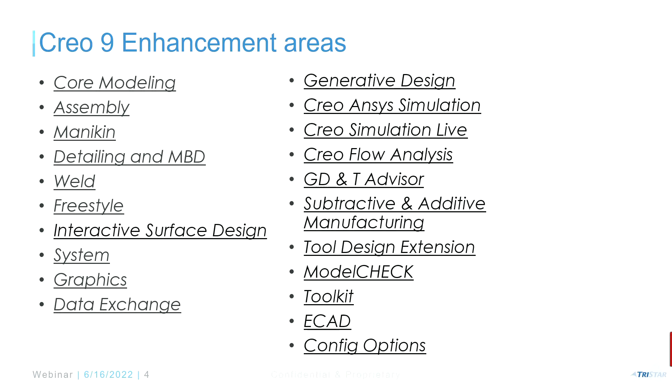Usually I'll run through a couple of slides, so I'll switch between the slides. But feel free to stop me at any point with any questions, anytime. I'll be showing most of the enhancements here - this is what I want to focus on.

But some of you might ask - most of you were on Creo 5 or 6, right? I don't think any of you are on 8 or 9. So I thought I should give you a quick overview. PTC's moved to a yearly release cycle, I'm sure all of you know. About 2 months ago, April 20th is when they released Creo 9.0. 9.0.1.0, the first maintenance date code, is going to be released in July it looks like, and 8.0 was about a year ago.

Some of you are already using it, so it kind of gives you the calendar. I just took some screenshots yesterday from PTC's product calendar so you kind of know. Creo 7, at the peak of the pandemic, is when it was released in April. So you're going to see very minor incremental changes moving forward because of the yearly release cycle.

Compared to back in the days, going from Pro-Engineer Wildfire to Creo 2, or from the old iSquare to Wildfire - remember, it was a big change, right? You're not going to see that anymore. It's going to be incremental, okay?

Windchill - how many of you use Windchill right now to manage your files? Before moving to Creo 9, I personally used to be an admin during my industry days. We don't recommend moving to 9 with 9.0.0.0 being the first date code - we recommend allowing it to mature. But you also have to know what is compatible, so you have to be on Windchill 12.0.2.0. We could share this PowerPoint with you.

This is just a quick matrix - in order to do Creo 9, as you can see here, you have to have at least 12.0, and that's where it is. You can see the compatibility chart here. So let's get to the main things.

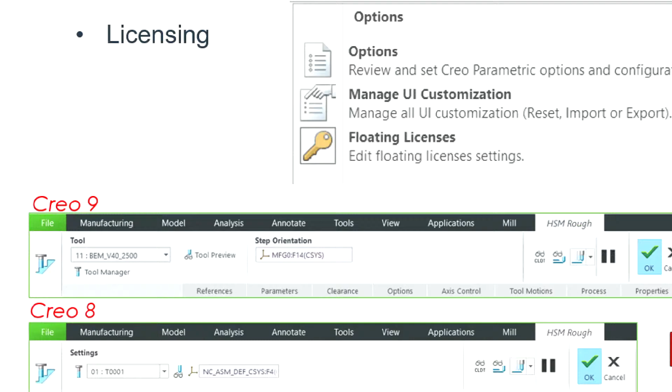They've modernized some of the dashboards, as you can see here. This is an NC one where they started doing that in Creo 6, Creo 7, where they laid it out a little bit here, and they've done it on NC in augmented reality areas, and also in sensors. There was something called Creo Product Insight extension.

They've improved the dashboard. For the users, though, I really like how finally you can look at the license information right from within Creo. Remember the old PTC status? It's still there for the admin or any user to check who is using licenses, and whether any free licenses are available. Now, right from inside Creo, where you have your floating licenses checkbox, you can click License Info, and it'll give you very useful information, I think. Before, admins had to set up that ptcstatus.bat file for the users, and they had to click on it to see it, so I think that's pretty nice.

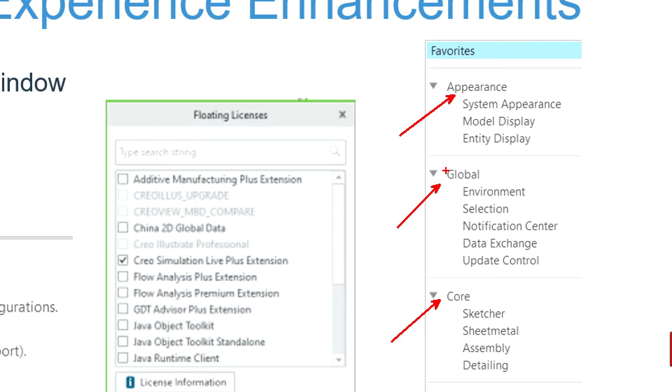Okay, so a few things. I really like how they structured the options now. See here? Appearance, global, core, right? Before it was all in one single list. Maybe I'm doing top-down design and I want to set up some control on external reference, for example. I had to go to assembly. Now they have global, system appearance, and core areas like assembly controlled separately here. So pretty much the same as before, but I like how it's structured, okay?

Now, one minor thing, it's not a major thing, but we've had customers ask, because in some other CAD systems you can use the arrow keys to rotate and spin. Finally, PTC has that now. In Creo, you're able to hold down Shift and use your arrow keys to rotate. Shift and Alt will do the screen center, which is the model center.

In fact, let's take a quick look, right? Let me switch to, I had a couple of models open already. I have just an assembly here, a data set that I use for my demos. By the way, I'm using Creo. This is the one I was talking about first.

If I go to File Options, see how it's kind of appearance, global, core, right? A little structure, I think, that's not a big deal.

If I want to look at my licensing, I can go to File Options, Floating Licenses. Now, I don't have any floating license in there, but at least if I click on License Info, there you go. Remember, in the past, you had to go to PTC status, if you remember how to get to this one, those who've used Creo probably know that, right?

You go to your C drive, or in your admin, the admin has set it up for you. In my case, I'll show you the old way of doing it. You have to literally go to program files, where I install my FlexNet license server, for example. I've got my PTC folder here, my FlexNet admin license server, and then you have to go to bin. I used to have a shortcut during my industry days, but there I could go to PTC status, run that, and it'll open up a command prompt showing I'm having a standalone license, unlike your company where you're all using floating license. So this is kind of how you'll know what is free, what is used, etc. This used to be there for a long time, ever since I can remember, since the 90s. But I like how you can access that right inside of your file options now, that's a nice thing, I think.

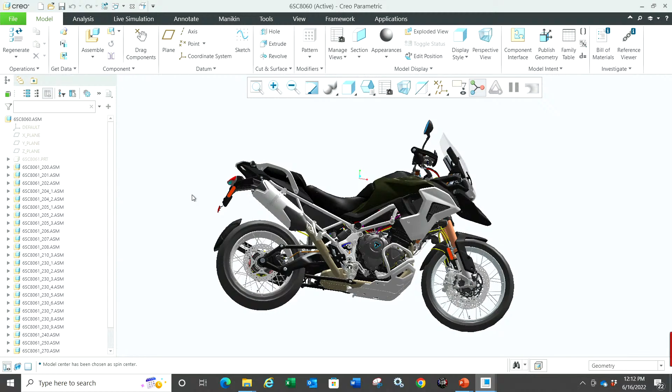I'm just thinking, why do you think this might be helpful, for example? Maybe I'm going to some precise view here. I may want to have some slight precise orientations, right? Before you had to go to View, Orient, and use an arrow key, but now you're able to just use Shift and slightly navigate. Can I control that angle? Don't you think it looks like 15 degrees right now? Absolutely.

You can go to File, Options, and under Model Display, there is this default rotation setting, 15. So maybe I could potentially switch that to 90, right?

I can go from front. I remember during my industry days I used to use VF for view front, there was a map key I used to have, VB for view back. You can still do those. Those who are fans of map keys, how many of you use them? Even now, keyboard shortcuts, it's still there. Good old days, right? It reminds me of that. It's nice that they have it.

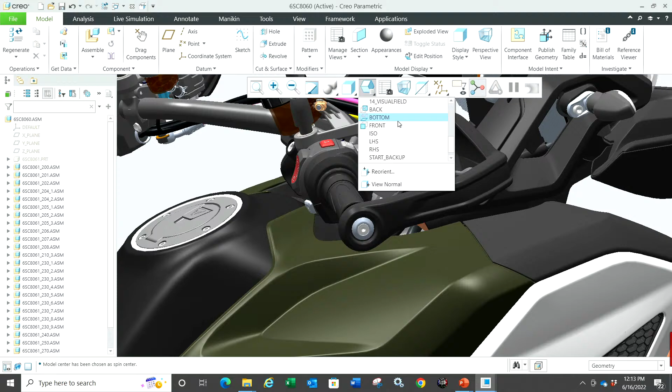So for example, I'm going to set it to 90 real quick, and I'm not going to change my config option here. Let's say I want to go to one of the front views, not a big deal, just a regular view like this. Front view. I can now go Shift, and if I do this, you see that? I'm using my 90 here, using my arrow up and down keys, which I know most of you may have macros for all this, but it's another option there.

They also, I don't know how beneficial this will be, but you could zoom out a little bit, or off the screen center. So far everything was model center. I can hold down Shift Alt, and then right-click here. So what I'm doing is holding down Shift Alt, where the model center or screen center becomes my point of reference, and it's rotating off of that. So a couple things, nothing groundbreaking on the usability side, but a couple things in there.

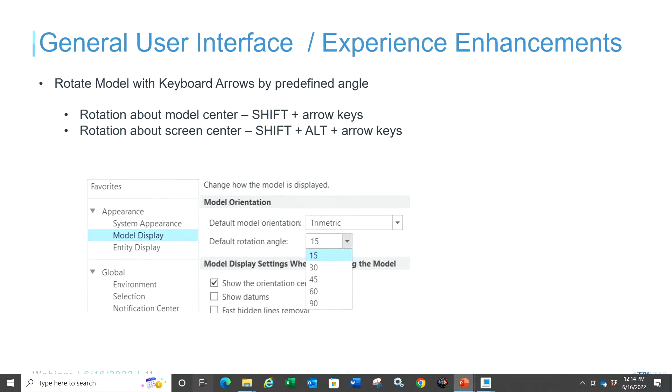Now most of you may have used this before in Creo 4. How many of you used the mini toolbar? I'm a huge fan of the mini toolbar, the right mouse click. It was long overdue, I thought, since SolidWorks and every other CAD system had it. We were the only one that didn't have a floating toolbar. So I hope you've customized it, right?

Config.ui, they used to have zoom to in there before, it's nothing new. But you have a new config option that allows you to control the level of zoom. Where would I use it? When you have a failure in an assembly or part model with a missing reference, I'd like to go to the reference viewer and zoom to. But sometimes it's a very tiny missing reference, so I like that config option where it's set to 1. You can set it to 2.0, 3.0, controlling the zoom level, so it zooms in a little more quickly and you're not spending time navigating.

Now please remember, moving forward, all config options by PTC will be backported to previous releases. If something is introduced in 9.0, there's a good chance it may be available in a previous release for a later datecode. Just an FYI.

So we'll get to sketch on a few things, but let me get into one of my designs real quick here, so maybe I'll just open up that model. This is the one I was talking about, the mini toolbar. I'm sure all of you have customized this. You can always right-click customize, and you can always add additional commands there.

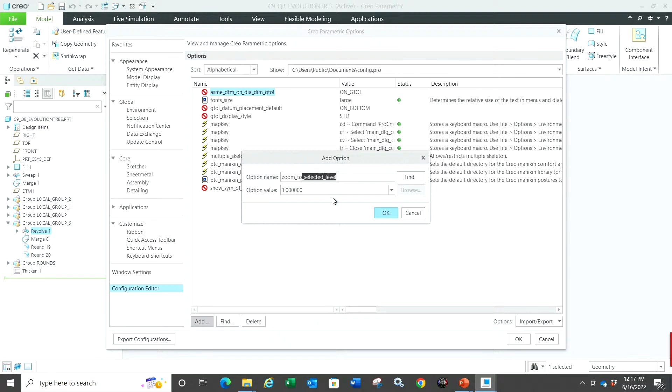The good old config is still the same. I'm sure many of you use the config.sup, the supervisor config, the local config. There you can go and say, I want to add, for example, zoom_to_selected_level. You can share the PPT, you don't have to note down all these configs, but they're all available on the PTC site too. But the size is 1. I could set it to 2, let's see how it looks. I'm going to set it to double the scale there, and now if I go up here and say zoom to, it goes a little bit inside.

Same thing works on reference viewer. I'm sure all of you like the good old reference viewer. What is it used for? You can investigate the parent-child relationship when failure happens, right? We all know that, experienced users have been there for a while. So you still have the good old parents and children, this feature is in the hot seat. I'm investigating that right now, and I can always go into any of these references inside. This was introduced way back in Creo 4 also, actually. You can click on any one of them. Again, if I go back in here, right click, and I can zoom to any one of them, same thing. So it was there even before - not a big enhancement, but I like some of the usability enhancements there.

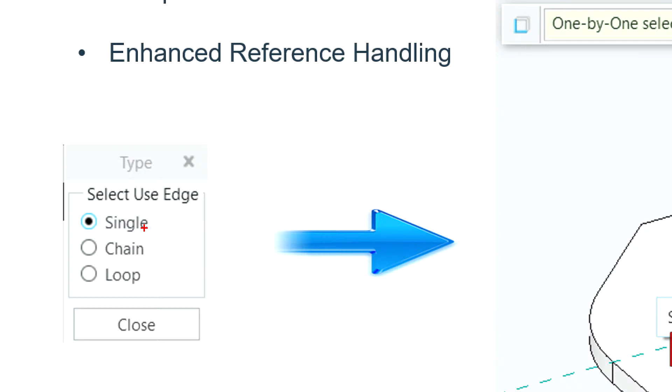One of the big ones in Creo 9, I finally got rid of that menu manager for project and offset. I thought it was long overdue. How many of you use project and offset? That's how you build design intent, right? Maybe I want to create an offset, like a group off of that - when they change, it should update. We all know that, the power of Creo. The problem was that menu manager, it'll come with single chain, and the flip arrow is always in negative direction. PTC worked on it finally - it's more consistent with the regular selection techniques. Remember the shift-C boundary loop surfaces, many of you may be using it - it's very consistent with that.

A demo is always better than a PowerPoint, right? So let me switch to a model here. I'm going to go to Creo, and let's say I want to go to shading with edges here. Just a simple model we put together.

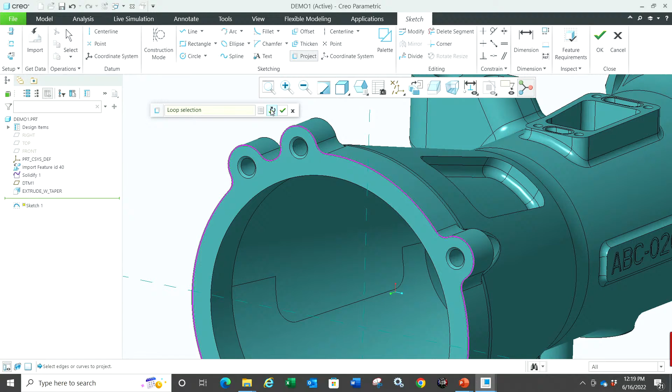So let's say I have to - I'm going to use multi-body here, and I'm going to create another part on top of it. By the way, how many of you use multi-body in Creo 7? Some of you, okay, I'll just create a new extrude here real quick.

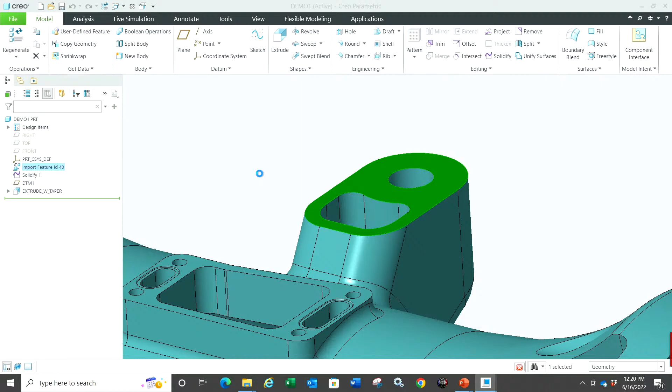And let's say I want to go and start creating some, maybe not on that geometry, I want to have an offset plane that I'm going to use real quick so I can literally see. Maybe I want to just sketch on this plane here, right? I have an offset plane where I'm going to quickly do an extrude. And when I'm doing that extrude, what I'm going to do is I'm going to go project. And if I put this edge, you see how it gives you a preview.

That's it, right? So I can still do my old school one-by-one chain if I have to, but it's not a good practice. Why? From a referencing standpoint, every edge has an ID. We all know geometry ID. So you cannot replace them quickly. If you pick them as a loop, you have a better chance of failure not happening. This model is more robust to design changes. So that's kind of what we are doing here, right?

I can hold down the shift key and get the tangent loop, for example, or I can do the surface loop, right? Or I can say, no, I don't want this as a preview here. I can leave it, I can do the same thing on this one. I can hold down the shift key and get this one, right? So it's a little more consistent now. Some of you may not like the shift thing.

You click on this guy here, the details. You can go to the details, and you still have your old school rule-based selection, right? If you want. Remember, this is a button that's available in all features in Creo, right? It's been there for a while. There you can say, okay, I want to have a partial loop or a tangent loop. You don't have to use a shift key itself, but I'm just saying, right? You could.

So let's say that I want to get done with this one here. Maybe I want to project it. I want to project one, and maybe I want to use the entire kind of loop there, right? It's one loop. I also want to maybe select, I'm in repeat mode right now. I turn on my repeat. It'll stay there forever until you exit out of it. And I can just pick another guy here. I hold down the shift key, and I keep adding additional ones, right?

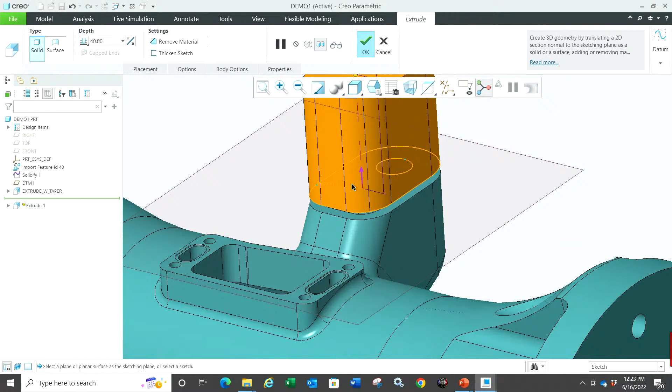At this point, maybe I want to just drag this guy, and all of you know the shift snap, I hope, right? You can hold down the shift, snap, and you can quickly go up to surface, right? And you're going to add material here, but I'm going to do a new body, right? I'm going to create a new body here. Let's see if I could just go the blind depth, actually. And I'm going to just go up to the surface there, right?

I created a new solid here, or a new body. As you can see, I got two bodies now, right? There's my gusset body, and there's another body here, right? I'm able to go and make it transparent and all that, right? So, but what if I want to kind of replace this edge geometry with this one, or maybe I should have actually added this as my loop, right? This is what I should have added as a loop.

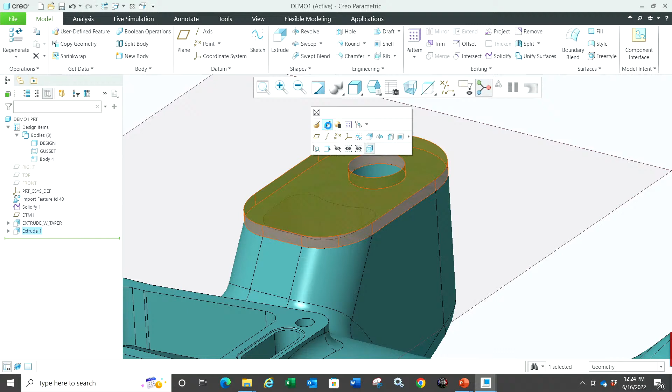I could quickly go into any of those features real quick, do an edit definition here, and I can pick it that way like you normally do, or you could use the references. I'm sure most of you know the edit reference, where you switch references. It's supposed to be a good practice, where it'll highlight all the edges, as you can see here, right? Including the edge you picked and the other edge you picked. I could just say replace that guy with this one and do a little preview, and just like that, the loop worked. Is that making sense? I didn't have to go and pick it again, right?

So just a simple example to show you that robustness of the design is kept more when you do the complete loop there, right? So just one small enhancement, I would say. Hopefully all of you like the new methods of selecting, right? The whole shift key and picking it, right? Oh, this is long overdue, I thought. During my industry days itself, I had put together an enhancement request for this.

Have you noticed always the first sketch is huge in Creo? What is the workaround? You have to either change the plane size, right? There's a lot of workarounds. I used to create a dummy circle, hide it in my start part, so everybody will start with a 5 or 10 millimeter an inch model, right? There's several workarounds. Finally, the first weak dimension you change, it will automatically scale, kind of like the old school log scale. It will scale everybody else.

So let me show you a demo. It's really only for the first sketch, right? This is long overdue, I thought, by PTC. So let me create a quick model here, right? I'll just do a new part, right? By the way, it's only for a new part. It doesn't even work when you do edit definition. It's only for the new part, okay? When I'm creating a new part, for example, I'm just doing a very basic new part.

Sorry, I'm going a little fast. I want to include as much as possible. I hope the pace is okay. I'm talking fast too, but there's a lot to cover.

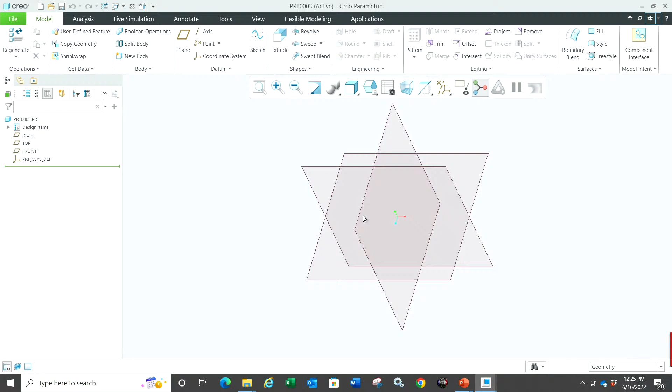So I'm going to go into one of my sketches here. I'm going to do a sketch feature here. And let's say I'm going to hide my planes and everything. Right, and let's say I want to do a quick, I know it's not a good practice to add a chamfer in the sketch, right? I would have done this as a chamfer, but let's say I'm doing it anyways. Okay, so I just want to show you, there it goes, right?

I'm done with it. Remember, the old school method was you had to drag select all the dimensions. Remember that guy, the little modify guy right there? And then you had to do the lock scale. So if you change one dimension, everything will proportionally update, right? That was the best practice until Creo 8. Starting Creo 9, why do we still have it? Because you may still have to use it during edit definition. I wish PTC would have made it always like that, but they're making it only for the first feature, okay?

So how do you do it now? You don't have to do it that method. Just watch the dimensions here, right? What do I have? 269, 142, 150, some really huge values, right? All I have to do, select this guy and set it to 1. Watch what happens to the rest of the weak dimensions. 0.6, 0.53, 0.59, the angle. So I thought this is long overdue by PTC, right? Something like this, they do it after a long time and call it an enhancement. That's interesting. So anyway.

Does it affect... that is in Creo 8 itself. When you do a circle, let's say diameter 5, Creo 8 doesn't have such extreme values. It doesn't go like 100. They fixed it. That's a very good question. So what Mike is asking about is when you do your first sketch, have you seen it? You'll always have to zoom out. It's really some huge values. That's being fixed. So hopefully all of you like that one, right? There it is. So very minor in sketches.

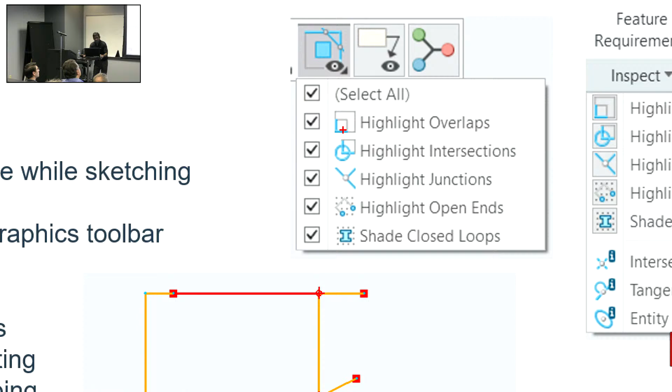Have you tried the highlight overlap before? Many times I would copy an edge 2 times accidentally. It'll be right behind, but it'll never highlight. Have you seen? You drag it and finally it will stay. How about fixing a bug and calling it an enhancement, right, by PTC? So, anyway. Let's just go back to Creo, and I'll just open up some models here.

Let's see. This is a demo model I used to show customer sketch regions, right? If you remember, they introduced sketch region. I know it's a bad practice, I've done a lot of entities in one sketch. Sketches are supposed to be simple, but let's ignore that for now. It's an educational example, okay?

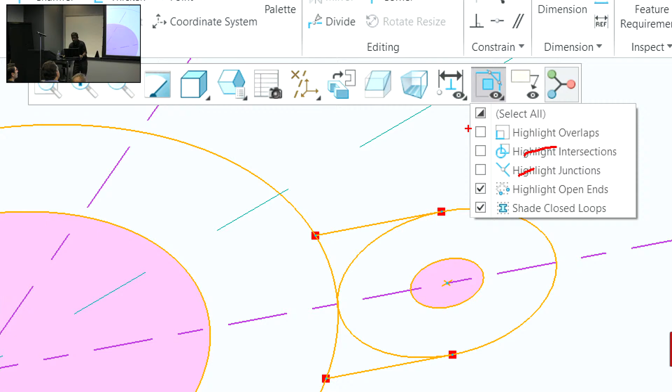So I'm going to go to this sketch and do an edit definition on that guy. And I'm going to hide my dimensions real quick, my constraints, so we can reduce the clutter on the screen. They have this new highlight junctions, highlight intersections. Before it used to be overlaps, open ends, and shade closed loops. Remember that? For inspection, before you're exiting the sketch. That has been there for a long time.

So let me uncheck everything. If I say show only junctions, it should show these guys in here. See that? But let's say for the sake of it, I'll just put in some line in there. And if I say show highlighted intersections, it highlights those intersections. Or let's say I had a line on top of a line or something like that, right?

Before, when you do highlight overlap, have you seen it, zoom out, zoom in, it goes away? It's not staying. Many of you are shaking your head, so you've been there. Finally it stays. You know what I used to do? I used to go down here, switch to geometry, the good old days, and then drag select, double click this guy to select it, and it'll highlight how many lines. It's a pain, right? And finally they have it.

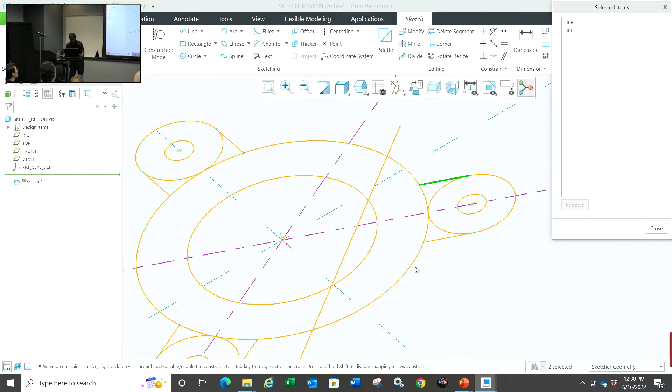You shouldn't be spending time on these, you should be focusing on your design, that's my opinion. Let me just go back to my presentation here. So really very easy to remember, three things in sketches: offset, project improved, auto scale, and the new inspection tool. That's it. Okay, this is a big one.

How many of you are FEA users here? Simulation or Creo Simulate or Mechanica? Some of you. So you do know in simulation, sometimes you have to apply a load locally, right? It's being held in some location, you're mimicking the real world contact. We have to do it local. For Creo, it's one single geometry, but we have to split it. Creo Simulate and Mechanica had a feature called surface region for a long time. However, Creo itself, the CAD side, didn't have that. Finally, they have something called split or divide surface.

What does that do? A lot of use cases in MBD, for appearances. Maybe I want to quickly do an offset, like an emboss feature. Have you tried this? It's doable, but a lot of workarounds: first you have to do a surface offset, create a sketch, do a project edge. I'm going to demonstrate within the time we have, I think we're good on time. I will show a lot of use cases. Could be used in FEA, could be used in sheet metal, to show the permitted stamping tool attachment surfaces here.

Or maybe in MBD, I'm going to send it to CMM or CAM or an inspection software, or even a STEP AP242, and when that downstream user clicks on the note, it should highlight those semantic references. We all know the importance of semantic reference. But now you're able to split surfaces just for appearances and for selecting semantic references. This is a big one. I would say in part modeling in Creo 9, this is the biggest project they worked on. PTC product managers typically train us before they release the beta version in January, and they told us this has been a long time coming.

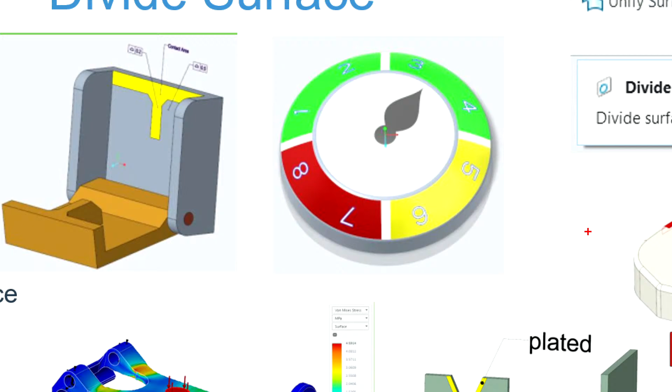Even for appearance, can you see here, how did I do this one? You all know in Creo, a circle is always broken into two halves. It's a geometry thing. That cannot be combined, unfortunately, it's still the same way. But at least you're able to unify split surfaces if required. So we'll go through some quick examples. That's just a high-level overview, but let me quickly switch to Creo, and I think I'm probably in one of those parts.

Just removing some of my files here. So let's say I have maybe this one here. I had a few demo files prepped for this one, so I can quickly show you most of those in like 5-10 minutes here, and then we'll move on to assemblies and drawing a little bit.

So what I have here is a model. Obviously, it has 2 bodies, right? It has a main body and a fixture body. I've hidden the fixture for now, right? There's a fixture, but we'll get to that.

In Creo 9, if I have to split the surface, have you seen every surface? What is this surface really? It's a surface ID. It's a natural surface, right? It's created during the extrude. What if I want to just create a patch for selecting? It could be for applying a specific surface finish or a GTOL, or it could be for aesthetics, right?

For applying a texture. All you have to do now is you select that one, and then maybe I'm going to just sketch real quick. Just do a rectangle, no big deal, just a simple rectangle for now. Done with that rectangle, and while that sketch is selected, this is new divide surface here, right? That's a new enhancement in Creo 9, okay?

Now, separate surface region has been there even before. Have you seen sometimes the contour, you do 2 extrudes, it'll be one surface, you can split that, so it can be selected independently. So that's been there for a while. So let me just show from a simple one, and then we'll slowly show you different use cases.

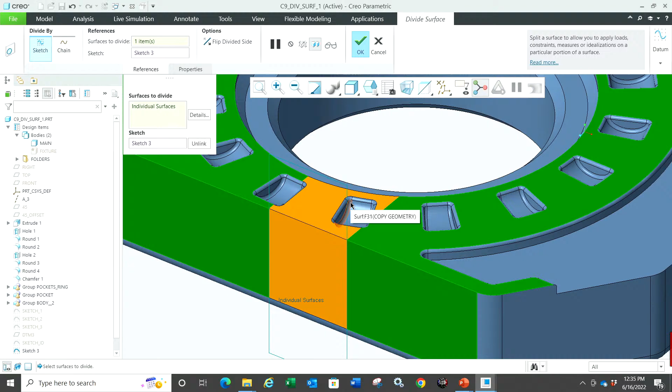Is it a good practice to have the original geometry ID to this guy? No, right? So there is a way to flip the ID, right? You could say, okay, I want to flip the ID because right now if I do a little preview, right up there, it's using that as the ID. So I can just go back and resume, and I could say, do you want the original geometry's ID to be on this one or this one?

You see how I can split that. So what is going to be our parent surface there, right? If you care about the IDs in there. Everything, it's all ID based, as you know, right? So I can go flip it back on here. That's a surface. Now I could just go and say, instead of individual surfaces, how about just selecting the body?

And in this case, can you see it literally just projected onto and split the entire model based on how it's projected right there, right? So in FEA, we used to do this. This is where the model is being held, right? When I'm doing a test, this could be a part that I put in a shaker table test and do a vibration study. Not the same example, but that's how we used to use surface regions. I'm glad they have it in the geometry area now, right?

So is that identified in the model tree? Yes, that's a very good question, as a feature. If I hit OK right now, it will show up as a divide surface. That's what your question is, right? Absolutely. Now, and the ID, there's two IDs now, right? There is a parent surface ID.

See, if you do a block and extrude it, why does the ID always count like 54, 45? Because every vertex has an ID, edge has an ID. We all know it's math-based. So this used to have, let's say, ID 59. Now you're going to see an ID 60 or what have you, right? Whatever number it is, there are going to be two IDs. But it's selectable, right? In fact, for now, I'm going to go back to it, redefine it, and I'm going to just say, let's just go with instead of the body, right?

You know what, I'll just leave it for now on this surface, right? So it's splitting only some surface in there. You can also use surface regions. In fact, let's see here. Yeah, it's okay, I have a few sketches that I've hidden real quick here.

So there it is, all of you know sketch region. How many of you use sketch region? Okay, starting Creo 5, you no longer have to have fully closed ones. Have you noticed, if you shift G, it'll switch to geometry, and if you go shift S, it'll switch to sketch region. What is the advantage of it? I can just grab sketch regions.

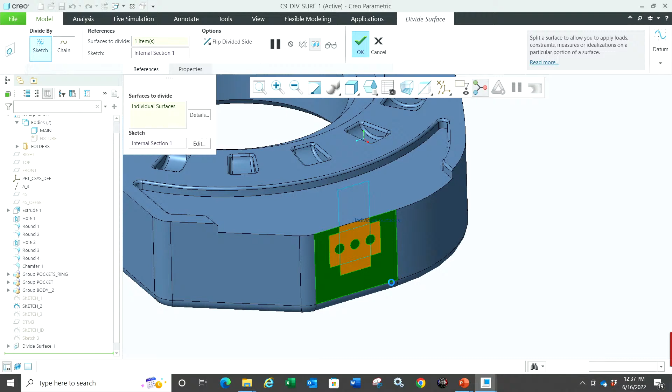Kind of like in SolidWorks and Inventor, right? Some of you may have used it, where you can grab any sketch region there. They're all regions that can be extruded. I'm going to select these regions, no matter how they're done, and I'm able to go and say I want to divide this, and I want to divide it where it should be on that surface, and also on this surface. This is where it's going to be held, or maybe that could be a clamping surface, that I can keep doing. For example, I could keep selecting the surfaces in there and apply a different color for it. So that's one other advantage of using these features in here.

Let me just go hide it. I also have, let's say you want to do maybe a couple of sketches I've already done. Does the sketch have to be closed? Absolutely not, I can have an open sketch like a line. As you can see, I just have a line, and I should be able to divide that guy and say divide it. Now I want to divide it across all the side surfaces.

Those who have done castings, have you used a loop surface selection in Creo, where you can pick the top, shift, pick the edge, it'll grab all the sides? You shouldn't be wasting time selecting multiple ones. This is a general tips and trick. I'm going to use the same method here if you have not used it. See, I don't want to waste my time picking all the side surfaces. How do you do that?

Have you tried in draft? During my casting days I used to use it a lot. You pick the top surface. Have you tried holding shift and grabbing the edge? That's it, one of the edges. You have to hold down the shift though. You see how it grabs all the others, all the sides. Of course, except the one that, since we are already split, you have to do that. So this is called loop surface, you see that? It's called loop, kind of like the seed and boundary.

It's been there for some time, but why would I do this? Maybe I'm going to do some kind of a controlled measurement on that guy in CMM, that's kind of why maybe I'm doing that. I want a specific surface patch to be there. That could be one reason. So there's several good use cases, I think.

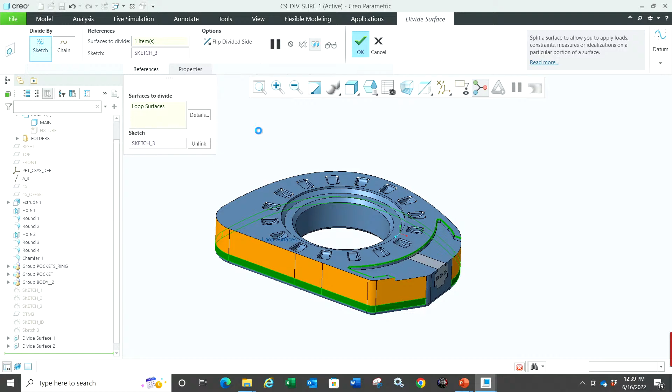So that looks like a parting line for now, you're right. Well, yeah, that's the way I put the parting line in. You could put, and then you want to do a draft off of that, right? You're right. Or you could do your old school approach, the curve on both sides, or use a quilt. That's all there, but this could potentially be used for appearance, or maybe I'm going to apply some notes.

This new feature is very similar to sketching a curve and then doing a project, except instead of a curve, it's creating surfaces. So you don't have to project. That's a very good point, right? That's a two-step process - you're projecting it, you have a curve, and the surface still remains the same. In this case, it's kind of splitting, it's doing two things in one go. Yep, that's a very good point.

Now what about, let's see, I'm almost, let's say I want to go and do a couple more here. I'll probably just remove some of these, or at least I'll have this one here. How many of you currently do MBD, model-based definition, or where the drawing becomes optional?

I'm not going to say drawing is removed. Drawing becomes optional, where you do all the annotations to the 3D model, right? That's what it is. Can I now add a note?

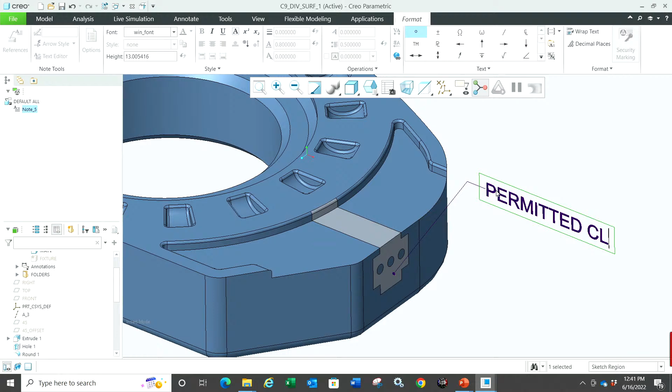I can go to my annotate using this, and I should be able to add a note. See, for example, this shows the text and the direction, and I could add a leader note here, something like that, right? So those are, I don't know, permitted clamping surfaces or something like that. You see what I'm getting at.

So when somebody selects this, I've got my 3D notes turned off, there it is. I'm able to select, I was in sketch regions, that's why I didn't pick it up. It selects it, I'm able to go to my semantic references here, and as you can see, I could query select as an intent surface. You see what I'm doing?

Those who know intent, I picked that as an intent, thereby, if I'm sending this to downstream manufacturing or inspection, or a step output - all of you know step AP242 - when you output it, anybody clicks on the note, it need not be in Creo, it could be in Creo View instead. It should highlight that. You see, that's called a semantic reference.

This data isn't lost when you step it out. Exactly, provided you do step AP242. That's the key. So it's a very good question.

Most of you know in Creo this has been out for a long time, so anybody does a semantic query - see this little icon here? If I do a semantic query, this is not your old school references for attaching, remember. This is a semantic reference, meaning this is carried over to downstream areas for consumption - it could be for inspection, CMM, it could be for CAM.

And like you said, if somebody wants to export this as step, you would just go File, save a copy, as always, that's not changed, and you do your step. However, when you do the step, you go to your step options. Remember to select AP242, the best one right now.

So for manufacturing, how many of you use CAM or MasterCam or whatever? When you send it out to them, the annotations from 3D are passed on, including the surfaces - I think that was your question, right? Does it do that by default? Please remember to do AP242. That's important, right?

Well, what you're saying, I'm learning something here - you're saying that you can actually not have a drawing and put a lot of that pertinent information into the model. And the first thought is, well, if I export that out into a step file, is all that going to be lost? Because what's the point of doing it if not?

Yeah, you're absolutely right, that's why when you do AP242, that's the whole point of why they came up with it. See, all these are standards - all of you know step and IGES, they're all standards. During my industry days, when I bring in a step, it works better than IGES.

The loss of data - I always say, SolidWorks sends me, for example, a Creo file, they'll send a step. It's almost like a rumor going inside this room, right? Two times data gets lost - they are sending a step, I am importing the step, so two times it gets lost. We will tell SolidWorks it didn't import properly, and they will tell us Creo didn't import properly, right? That's kind of how it is.

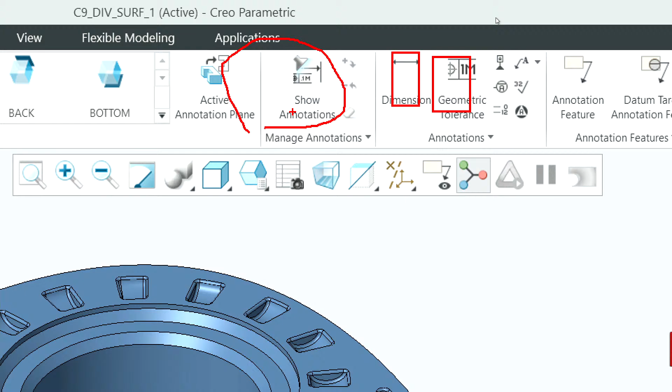I know that's a bigger discussion - MBD or MBE, model-based engineering and model-based definition. I'm sure there are additional presentations today on MBD, but that's going to be important. PTC has had annotate since Wildfire 2.0. How many of you remember? It's just that they're slowly upping the game, allowing more and more features to be included there.

Let me get back to the presentation, or actually, one last thing I want to show before I get out of this model, so I can at least talk through some of the remaining one. There it is, right? I have the other file. I know my note failed because I removed that as a reference, but that should be fine. Let me just delete that for now.

I do have another feature, like the fixture, that I'm going to unhide. How many of you use the intersect tool? Anyone? When would I use the intersect, right?

Before I explain this - you see, sometimes when I go over enhancements, it's nice to see how it has been there for some time. Let me open up this coil. There's a sweep example I usually show in my training, when I train a new user or an experienced user.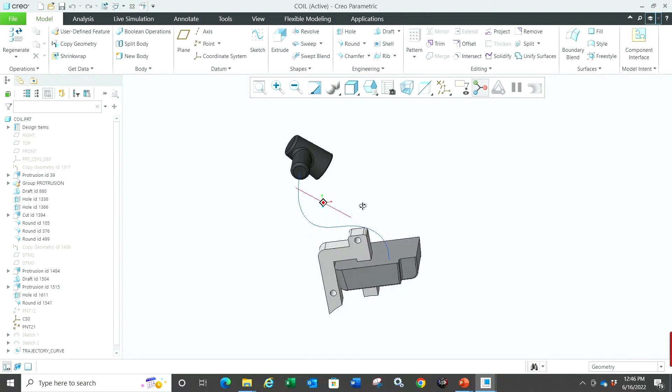The sweep - I'm not using piping or cabling, I can just click on this and do a sweep. All of you know, sweep is one of the easiest features. You go sketch and quickly do a circle. There it is, and let me just go and say okay out of that. Pretty straightforward, that's a 3D sweep.

Now that is cool, but how do they create the 3D curve? That's the question. Let me undo. How is a curve done? During my industry days, I used to import the point cloud - the CMM, the PTS file. You would have point clouds and you can create curves.

But in this case, don't you think all we really need - viewing in this direction, viewing in this direction - don't you think the way I've done this was interesting? Let me hide what I did. I created two sketches - this old school Pro/ENGINEER trick. You see this sketch here, if I go redefine this and go to sketch view, in this view I have my 2D. I'm not saying you always do this.

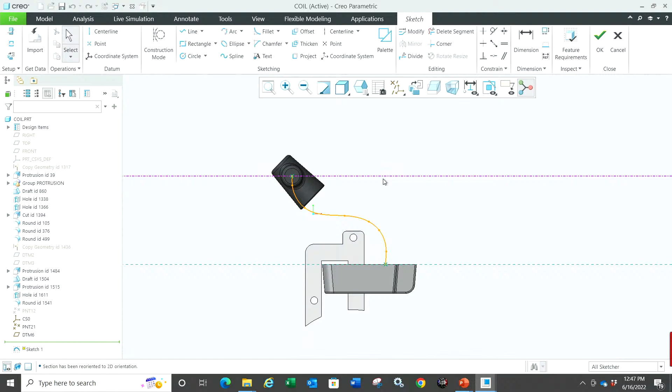You probably use cabling or some routing techniques, but there's a quick technique if you haven't used it. If I go to redefine this and go to sketch view, I have two 2D sketches. All I have to do now - have you ever tried selecting two sketches and selecting intersect to get to 3D? So what is happening behind the scenes? This is an old Pro/ENGINEER trick. Whenever I show this, I've seen many users say I wish I knew that.

Maybe the use case is my design intent is to ensure I show in the 2D drawing the dimensions - that's key on the side view. Now, if it's a pipe, if there's an elbow happening, I would have done it totally differently. I'm just doing a quick cable here, just for the sake of it, not actually doing it. You could go - what is happening behind the scenes?

Somebody's extruding this - I mean behind the scenes, this probably is what is happening. Not edit definition - they're probably extruding the other sketch, the second sketch here, and then you're getting the compound. That's really the intersect.

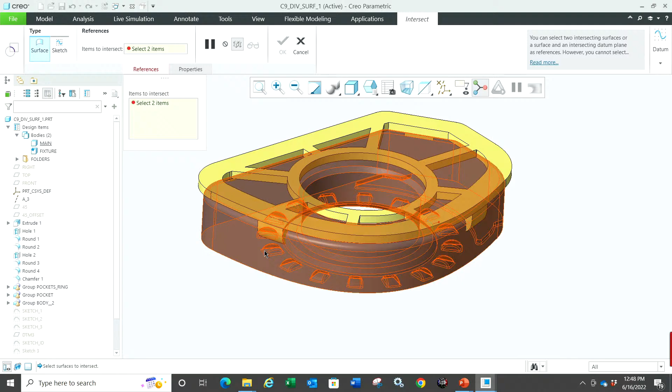Now let's fast forward to 2021, where PTC introduced body. So how about when I have the fixture and the design - can I use the intersect to get those clamping surfaces being held? I could just go use the same intersect, but instead of picking two curves, go to query select and get the entire body. I could just grab the entire body, and for the other one, go grab the fixture body.

And now that I have the intersect, if I could hide this guy, the fixture, see how it has created the curve. That intersect curve, now you know where I'm going with this. I could pick that intersect curve and do my divide of the entire body.

Oh, not the surface, whoops. Fast clicking there, so I keep doing right click and get to the body there. And there it is, right? Or I could go back to redefine it and say, okay, I want to flip the ID so that I get the new ID on these surfaces, not the outside surfaces there.

This could be used for my appearance now, right? I could go to my, where is it, view. I could go to my appearance, and maybe I want to select, that's my tool, whatever, fixture surfaces or what have you, and I'm able to pick.

Those who don't like the right click, you still have your good old query selection bin, right? I can pick the intent surface in there, and there it is, right?

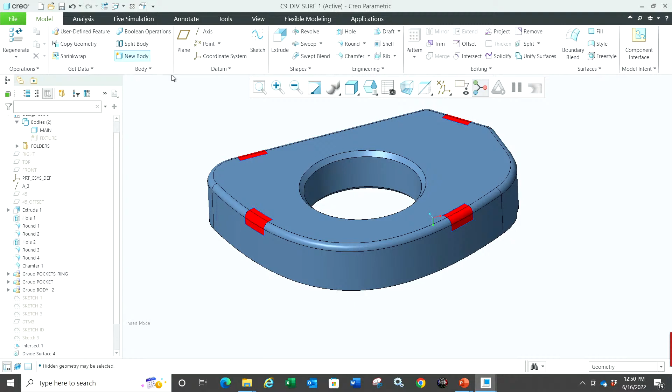So you selected the two bodies, selected intersect, and it generated curves. It wasn't like a cutout or material removal, it just did curves. You could have, that's a very good point. I could have, instead of doing the curve, I could have done a Boolean operation.

So if you're new to multi-body, in Creo 7, PTC introduced multi-body, where you could do a cutout, you could do subtract or intersect. Let's say there's an interference fit kind of situation, you could actually remove it. But I didn't use that, I was just showing the intersect curve option.

But you could have done this, you could have done, I want you to subtract. It's almost like Boolean, we used to do it in merge cutout, remember the assembly operation? Multi-body is the way to go now. I should probably send you my presentation on multi-body.

I've done an entire one on multi-body that will give you some better use cases, because it looks like most of you are new to multi-body, since it's only in Creo 7. So in Creo 6 we don't have it, right? So that's a multi-body use case. But yeah, all great questions.

So let me get back to, I know I probably spent more time on this than I should have, but got 10 minutes here, let's keep going here. So a few other things, minor things in there.

All of you know the time it takes to pattern, right? Especially during my industry days, I used to work on these speaker holes in a speaker. Back in the days we didn't have gig RAMs like these days. I'm talking about the 90s, where you just wait, grab a coffee, and it's regenerating 100 out of 245. I remember those days.

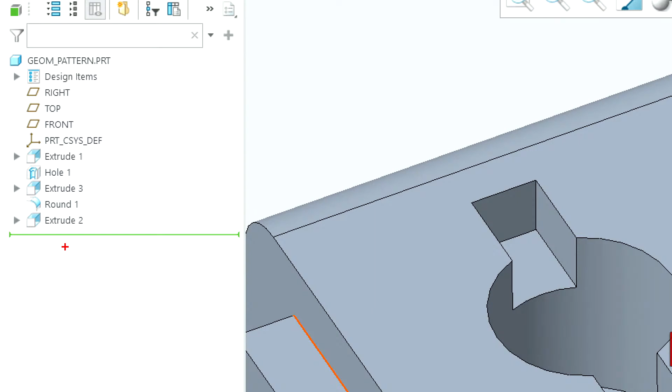Let's say I open up, this is a normal example I show to customers. See, it is an extrude and a hole. In the real world, these two might be way off here somewhere. They may not be in sequence. I may not be able to group and pattern it. What is the best practice to pattern that?

Simply select the seed, shift, grab the outside, let go of the shift. What is this called? Seed boundary. How do I know what I've picked? Right in here, you see that one selected?

If I double click on this guy, seed and boundary surfaces. So again, what am I doing here? I'm picking any surface. It doesn't matter which surface I pick. Seed. For example, if I want to pick only these guys in here, I could go to pick seed, shift this, and let go. You see what it's doing? It's just grabbing; the boundaries are cut off.

That's what it is, right? I'm using the same methodology to do for all of these, right? I'm going to pick this, shift, select this, let go of the shift. That's it. Having done that, I could do a pattern, but remember, that is not the regular pattern. It's down here. Not sure how many of you have tried it.

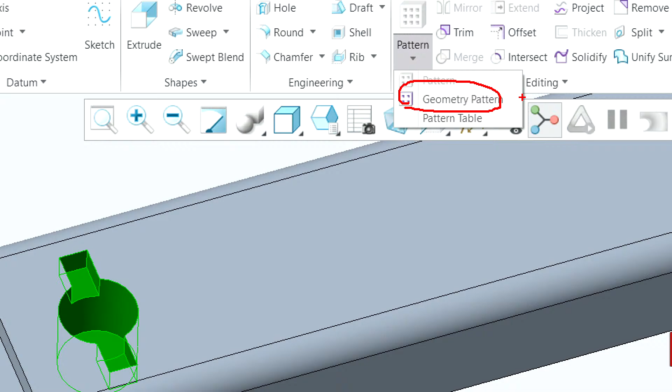If you have regular issues in your pattern, please use geometry pattern. It's been there since Wildfire 4.0. It's been there since the Wildfire days. It's nothing new. So I go here and go geometry pattern. Oh, by the way, I really like this in Creo 6. Have you guys tried the mini toolbar? You no longer have to go up here. This is a Creo 6 enhancement. You no longer have to go up here and use this.

Many times what I do nowadays in Creo, I use full screen mode. In Creo 4, PTC introduced full screen mode. That's how I forced myself into using mini toolbars and right clicks. You should try it, if you're not using the mini toolbar, because old habits die hard, right? I myself, a 20-year user from '96, always keep going there. In fact, PTC has a metric of how much time users spend going back and forth. It all adds up.

And I used to manage a team myself, and I asked the engineer, how long are you going to take to design this? All this adds up, you know? The clicks and picks are important in my view. So rather than going up here, next time try full screen. That's it. When you hit full screen, you're forced to use it; this has been there since Creo 4. If you go to the left and mouse over, it'll pop up. If you go up here, it'll pop up, right?

And now that I'm in the middle of a dashboard here, how do I access the direction pattern? I click somewhere here, there's my direction, axis, and all that. You see how you have, just do a left click, there are multiple mini toolbars, and I could go direction pattern, and I could pick this surface. I would have picked a plane as a better practice, but right now, let's say I want to have about, I don't know, 7 or something like that, right?

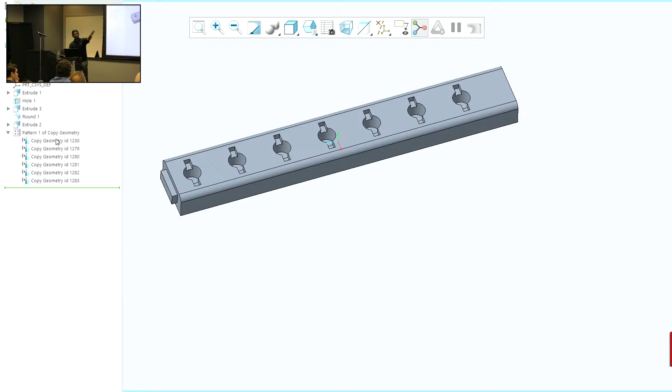Did I just do a regular pattern here? Absolutely not. It is a geometry pattern, wherein the feature definition is not taking over, so less regeneration time. Now the new enhancement; this has all been there. Whatever I showed you is not new. The new enhancement is, if you were to try it on a much more complex model, remember to switch it to identical, right? In fact, for the demo, I'll just leave it off, options. There it is, right? Switch to identical.

As you know, that's a best practice, right? For faster regeneration time. And it'll be really quick. That's the metric that I showed you here. That's a PTC slide, just to show you, right? They have a video of how fast it is and all that. Those who do rounds and drafts, I know I've got only 5 minutes here, I need to run through this.

You have better rounds. Have you seen before it'll fail, or have you seen the sliver surface in an IGES or a STEP file where it'll go to a singularity there? Those types of rounds now work, believe it or not. Before, you had to play with the accuracy, have you seen? Or you had to say stop at reference and click on that when you do rounds. So PTC is improving that.

Drafts were improved, as you know, in Creo 5, right? With rounds, you can add a draft now, right? That's been improved for some time. I know I'm going fast and talking fast to you, but I'll get through some of these. And this is a simple one, right?

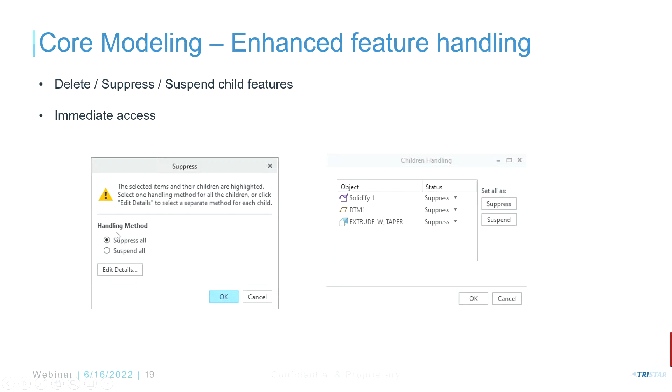When parent-child relationships fail, remember back in the days, you used to have suppress, freeze, quick fix. I'm not about quick fix. Now they have in one dialog box, you can either suppress all or suspend all.

If a parent feature is suppressed, you get quicker access to all the features, and you can say suspend all. You no longer have to go edit, select all, and suspend or suppress. A quicker access. So they're polishing, I would say, some of the UI. Hole config: our customers wanted the ability to automatically pick up the fit, close fit, medium fit, so they finally have a config for it.

Remember, all these will be backported to Creo 7 and 6. Anytime I show a config, they are backported. Don't think it's only in 9, okay? Most of them. Some customers didn't want the reset hole note when they make a change. They wanted to be informed, so the default is now no. That way you'll have to go back and hit reset if you make a change to the standard hole note, right? So these are multi-body things which most of you may not have used.

Oh yeah, the model tree is improved. They kind of made it a little more toolbar-like. You see that toolbar type one. You click on the filters. They look a little bit different compared to before. Like how do you filter things? It's the old, you can have a split tree, just like before, layer tree, model tree.

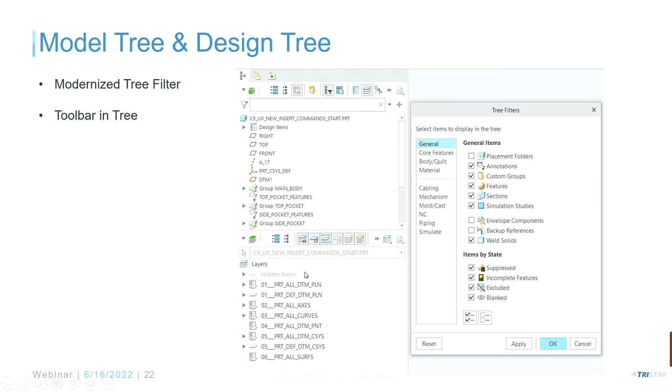If you do a lot of quilts and bodies, multi-bodies, as you can see here, you have a design items tree that PTC introduced in Creo 7. Now they have the ability to search for bodies instead of your model tree, so I'll just skip through. Do you all use surfacing? Anybody? A lot of surfacing here, right? I've always been to companies where there's 1 or 2 super users that is the surfacing guy. Somebody else tries to edit, they have no clue, right? Merge, there's a lot of features.

Now finally, I like this evolution tree where I can clearly, regardless of the feature regeneration, see it highlight what quilt is controlling what feature, and I can go to insert mode. This was there in Creo 7 itself. I have a better organized tree just highlighting quilts, right? Maybe for new users. All of us who have done surfacing, you know what I'm talking about. I can go back and you can do those, right?

So let's see here. I think, Mike, I have to stop in 2 minutes, right? Yeah. So maybe I'll quickly run through the last couple of slides in here.

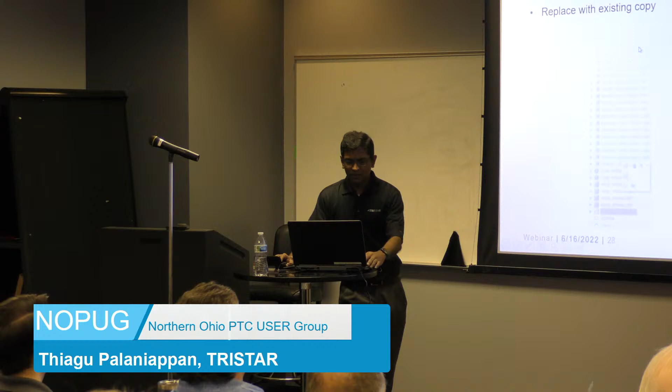Assembly, not a whole lot, just some very basic ones. You can combine the offset lines and make it a group. Before, you know, the long model tree, when you do exploded lines, you can finally group them. So a few things in there. There's a cool view field. I wanted to show this, but we ran out of time. It'll kind of show the blocking areas and create a quilt, right?

You don't need a mannequin, by the way. There's not a mannequin thing. It's a field view analysis. You select the eye of the mannequin, or any datum point, and it'll show the blocking areas. It's a big enhancement in regular assembly mode. In drawing, the main thing is surface finish is improved, ribbon interface. Other than that, I think it's not a whole lot.

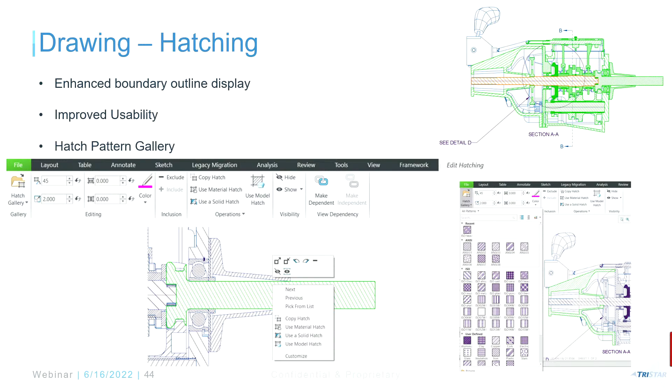Oh yeah, hatching. Remember the hatching? The hatch menu manager is finally gone. I call that the baggage of PTC, right? The Unix days, the done, return, finally it's gone. It is a little more ribbon based. If you click, it'll clearly highlight the border. You can right click, it's more user friendly. Let's put it that way.

There it is, right? You should try it out. Just go open any drawing in Creo 9, select it, right click. You see, this is your hatch now. Right? So that's a big change. Surface finish and hatching improved, okay?

So I think with that, I will run my last slide here. Those who are new to Creo 9, please go to Creo reference, and then you have a what's new. I know I just ran through a lot of things in a short time. I should have probably reduced the content, sorry about that. But the what's new has everything in detail. Many of the examples I showed you, you can download right from PTC's help. That's what I did, honestly. I didn't create many of those models. I went to PTC's help, what's new. They have YouTube videos these days. Everything is there.

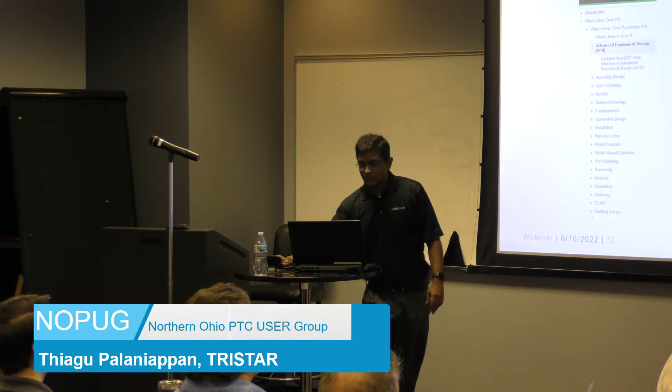You can download it and try it out. So that's it. And if you're planning to upgrade to 8 or 9, please go to the knowledge base and search for checklist, and it'll give you a checklist link that'll be helpful. This is very useful. For all customers, we recommend it. Go to checklist for updating to Creo 9. It has all the info that you need, okay?

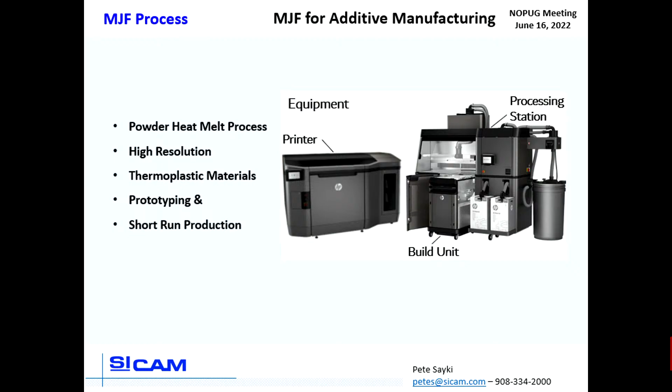So it is a powder process of nylon. It fuses the parts together by melting the nylon and the fusing agent. It's very high resolution, and it does thermoplastic materials like injection molded materials. It was developed for short run production, but you could also use it for prototyping.

So how does the machine work? Inside the machine in the build chamber, it has a wiper that goes front to back, and another wiper that goes left to right. The front to back wiper up top here is the one that lays the powder down, to a very fine layer over the previous layer that it built. After it lays the powder down, the other print head comes across the top in 10 seconds and drops the fusing agent and prints like a copy machine does. Inkjet, prints right down onto the powder.

After it passes and prints down on the powder, it looks like this. The heat lamp goes back the other direction, and it fuses the material where it dropped down onto the powder. And that's what a fused layer looks like. Then the machine goes back and forth and recoats the next layer. So layer by layer, it fuses the material.

Now, I say high resolution. The X and Y of those droplets it drops down is less than a thousandth in diameter. It's 8/10, so the droplets are very fine. The Z height of the layering is under 3 thousandths, close to 2.5 thousandths. So the grow lines on the model are very fine. A lot of the wire machines, the grow lines are 10 thousandths. They look very rough. So the parts that come out of the machine have very crisp corners and edges.

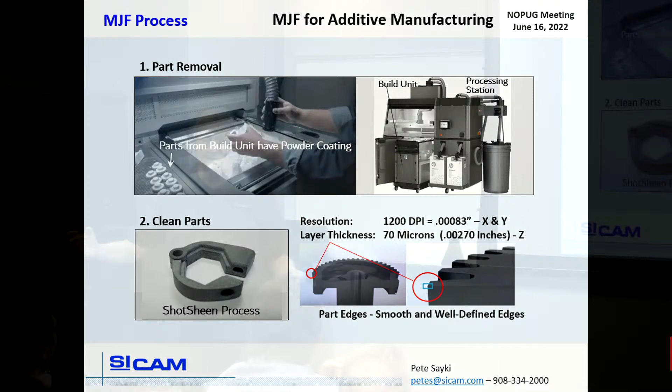You'll see it's very fine resolution. It looks like the part's almost injection molded. When it comes out of the machine, the build station gets pushed back into the processing station. And how do you get the parts out of this big chamber of powder with parts that were cured inside that powder? You vacuum it out. The operator has to sit there with a vacuum on the processing station about 20 minutes to get all the parts out of the build station.

And they come out with powder on them. You can't get all the powder off. So you see these parts over here to the left, they're gears. You see a lot of powder around them. Now HP wasn't too good at telling us how to clean that powder off when we bought the machine. They said, get a sandblaster or a grit blaster, do it by hand in a chamber. So we had operators putting them in there, spraying them with the gun to clean them. It took forever. I said to my partner, we're not going to make any money doing it at that level.

Well, he found a piece of equipment that was developed for another powder process in Germany, where you take all those parts and put them in this machine that has a tumbler, vacuuming and a spray system automatically. And we could do all the parts that were in that build chamber within 20 minutes. It cleans them to this level here.

So the parts, you see some of them out on the shop bench. They're gray in color. So if someone says to you, you print these parts, give me 50 of them, what color can I get? Gray. Now, you can dye them black. That's what HP developed, so we do have a dyeing station. You can take those gray parts, put them into the dyeing machine and end up with black parts. So that's basically how the process works.

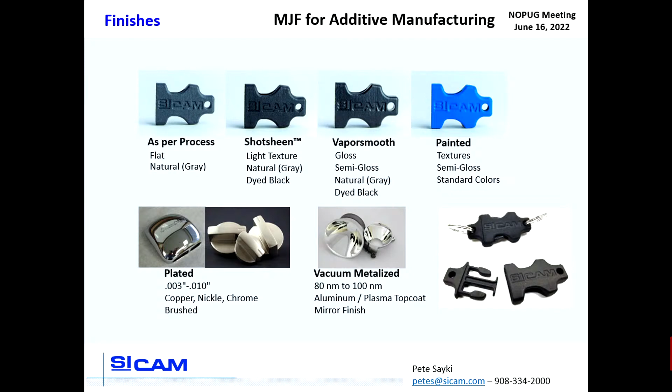It's a chemical vapor machine, and what it does is it takes the surface and chemically hits it. It actually melts the nylon's surface finish and causes the part to seal even better and harder. So for water applications, that vapor smooth process is pretty amazing.

We're doing one project right now that I can only tell you generally about due to confidentiality. It's a manifold that water goes through, a very complex manifold that you can't make... yes? Any restrictions on undercuts or other geometries?

Nope, I'm going to talk to you about that in a minute, about the design for freedom. That's another advantage we're going to get into in a little bit. But getting back to this water application, it was a pretty amazing project.

The vapor smoothing process is what really solved the problem, because any plastic is porous to some level. It'll take on water over time and swell. When you vapor smooth the parts, it seals the part. So for water applications, it's really a big advantage. We offer vapor smoothing.

Then some of my customers said, this stuff's so great, but I need a blue part. Can you paint them? So yeah, we developed a painting process where we put a light few thousandths paint coats on, and we can paint the parts. There's some examples of it out on the bench out there. So that's what you could do.

What secondary operations do we do? Most people ask about tolerances. Tolerances are a problem. If you CNC machine a part and then want to 3D print it, you're not going to get CNC technology tolerances. Now you don't need plus or minus 1 or 3 thousandths in a lot of areas on the outside of the part. Can it cut within 5 thousandths? Yeah, but you don't need that—only in critical areas. So the tolerances on this process are anywhere from 5 to 10 thousandths as an average. You're not going to get any tighter than that. Is it based on size of part, length? It's based on geometry.

It's a heat process, so there are a lot of complications I can tell you about if you bought the technology and tried to run it. I've got engineers who have been doing it for 4 years now—we've got it down to a science. But it's a very difficult process to control. It's done with heat, and depending on how you stack those parts in the cube and how close you put them, the amount of heat builds up. If you don't do it right, your tolerance grows on you. So it's really geometry dependent and dependent on how you set up the process.

But you could machine the part—we do a lot of secondary operations after machining. Secondary machining: a lot of reaming, a lot of inserts. In molding, a lot of people that injection mold do inserts in the part, so we do a lot of inserts. We do a lot of reaming and tapping, not too much milling and turning. But if you had a tight pocket with a chamfer and a counter bore that had to be held within plus or minus 1, you'd have to go in there and clean that pocket up. So that's the secondary operations.

Let's talk about quantity and size. So here's where you look at the process—you've got a 15 by 11 by 15 cube. Actual numbers are 14.96, but it's pretty close to 15 by 11 by 15. So as many parts as you could stuff into that build, and how you position those parts, is critical to how many you're going to process. It goes anywhere from 6 hours to 12 or 16 hours, basically overnight. We run it on the high end because I've got so many clients sending files in—we're running the machine full bore. You really don't want to run it for only 2 hours and only build maybe this high in that build.

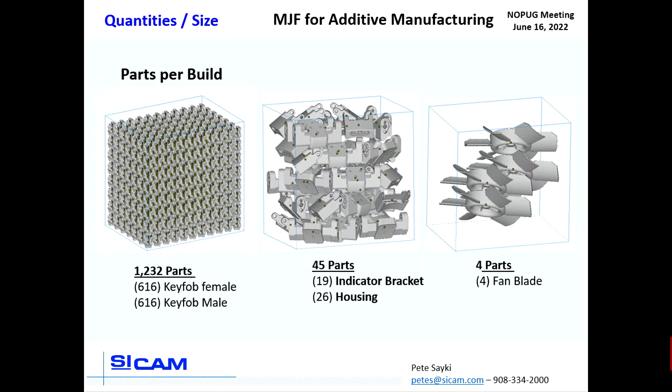I'm running a little fast on time, so I'll move forward. Basically, how you put the parts in the build chamber and the size is critical, okay? This is the clip—2 parts, female and male clip, here they are. 1,232 of these clips I could do overnight: 616 of one, 616 of the other. 45 of these parts, 19 of 26. If you have large parts, you're only going to do a few.

It costs X amount of money to run that cube overnight. If you do 1,500 of these, you pay $3 a piece. That's $1.50 a part, which isn't too bad, because they're small. So small parts are very inexpensive to run, and you can run higher quantities.

These parts are going to cost you $300 a piece for that fan blade. Now, I don't think you're going to machine that fan blade for $300, but you can make it for $300 and print it. And naturally, 50 to 75 for that part.

But basically, one of the things you have to realize about the technology is it's not going to give you high volume. It's really a low volume manufacturing process. Small parts you're going to be able to print between 25 and 1,500. So if you do 3,000 pieces, you can run it twice a year that way.

In the 30 years you've been watching this happen, obviously the biggest thing is the cycle time - what it takes to make this, because everyone else is going to compare it to high production tooling. So in the 30 years you've participated in this, how much closer has 3D printing come to reducing its cycle time, where it might need 3 hours to grow a part, where an injection mold's popping one out in 30 seconds? That's a great question. I'll try to give you a general answer on that.

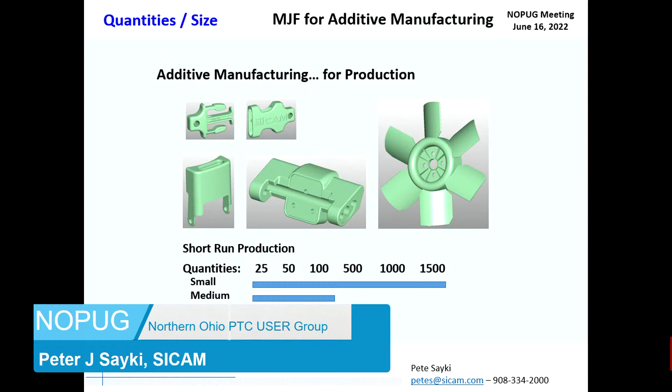So if you only need 500 of these a year, this size part, you have to go 4 or 5 years to pay for that $8,000. So you could run these parts for 4 or 5 years before you justify buying a mold. So the smaller the parts, the break-even point before you buy a mold is up here. The larger parts are different costs, lower.

For example, that fan blade there, that's 11 inches in diameter. That's a $16,000 mold, by the way, and that's pretty cheap at my China tool - that's been built in my China factory. You do it domestically, they're charging $25,000 for that mold.

So I could make you a part for $400. 10 parts is $4 grand. You may only be able to do 25, you can justify at 50 - you might as well buy a mold. So that's where the large parts end up, here at 50. At some point you're going to be able to purchase the tooling.

So if you look at that picture I'm showing you, the real thing is that you're doing low volume, very low volume.

That's correct. So the thing you're getting at is that with 3D printing, you could run 4 of those overnight, where it would take maybe 4 or 5 days to run.

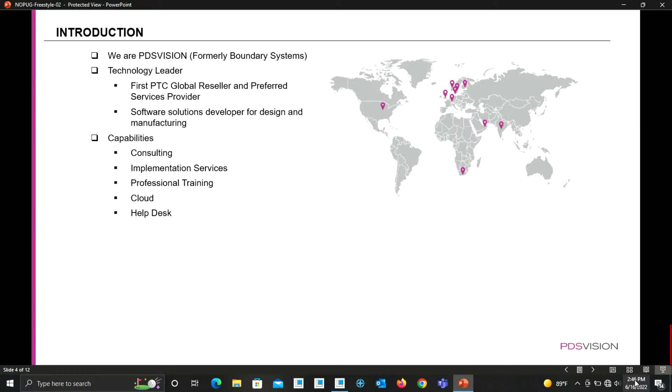Yeah, skip that. So I'll just touch really quickly on who PDSVision is. We rebranded in January, we were Boundary Systems. Switched from blue to purple because of our Swedish ownership. They're headquartered out of Sweden. Boundary Systems, now PDSVision US, is still headquartered here in Cleveland, Ohio.

I know a lot of you guys have been down to our training facility in Middleburg Heights. We're PTC's largest training partner in the US right now, which we take a lot of pride in. Mario's attended a number of our classes. So, all right, next slide.

So just a little history. Boundary Systems was founded just off the Detroit Shoreway back in 2006, over on Cleveland's West Side, and back in 2018 you can see the purchase by the PDSVision Group. Ever since 2018 we've just been operating as Boundary Systems, a PDSVision company, and now officially the rebrand.

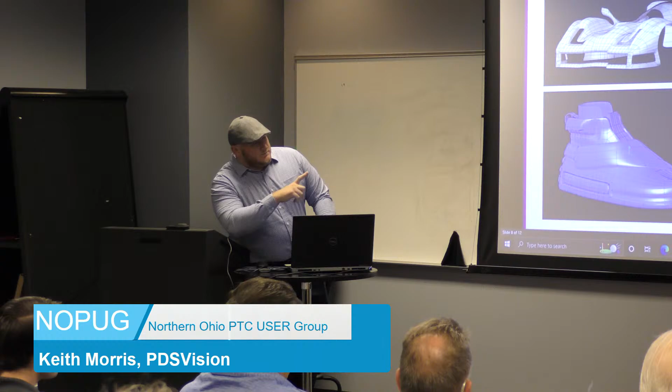To me that looks like a Viper up there, but the wireframe view here just gives you an idea of how far you could really take that tool. And then on the bottom is a really cool space shoe. I think it looks like a space shoe, but especially on the left with that wireframe view, it gives you an idea of how far you can really take it. And on the right are high quality renders out of KeyShot.

As I mentioned, they are developed and created organically. That's a good word choice, because this may not be something you use necessarily for a mechanical or a hard or rigid part, but even those you can add those types of features and then take it back into what you are used to. I'm sure even that first one on the left probably started from a cube. And then as it progressed, you can literally just start pushing and pulling and adding certain features to it, and then eventually it gets to the highest tessellation and allows for the highest quality.

So it's for a lot of parts that may have ergonomic design to it, a lot of curvature. I've heard the nickname swoopy, but yeah, it allows for those types of designs. I'm gonna give you a real quick crash course on this. Since we only have like 20 minutes, I'm not gonna do anything that's finished. I'm gonna turn those off. What I would like to show you is how you can very easily create and start a concept.

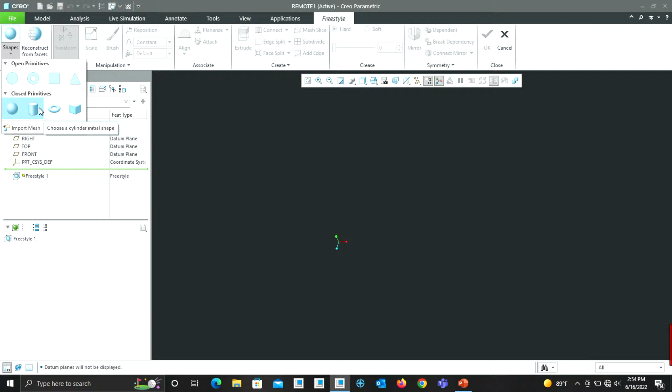So all the way over here on the right where it says Freestyle, that's where you want to start. And then up here on the top left is where you can select any of the 4 basic shapes here. I do want to point out there's going to be different ways you guys approach this. Everyone works a little bit differently, and it also obviously depends on what you're going to model. I'm just going to start to design a smart remote, like a TV remote or a Bluetooth speaker remote. I was doing this earlier today, and I started with the cylinder.

So right off the bat, I'm just going to start getting the basic shape down in here and start pushing and pulling. I don't have to explain a few of these things, but I am able to tessellate or create more subdivisions onto this model. So right here, I just want to split this in half, and I can choose to have 2 edges, 3 edges, and beyond. For now, I'm just going to put 2 there, and then I'm going to take this.

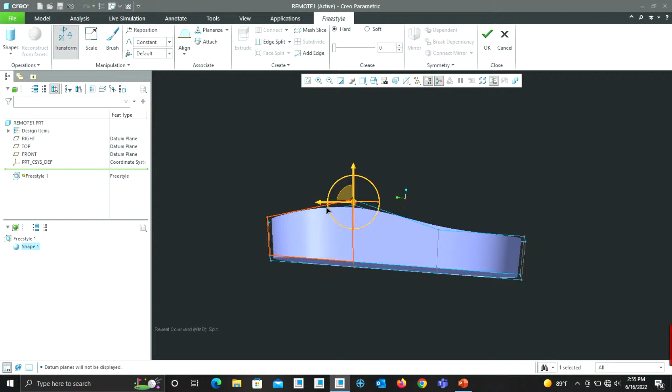I know I have the boundary around it, but as you can see, it's already creating this smooth surface right here, just by literally taking it and pulling it. I'm going to take this and tuck it under, take this, push it up. Whoops, I did not mean to do that. Now, can you assign numerical values to how much you want to push something in? No, this is strictly about taking the model and pushing, pulling, and moving it to the way you want it to be.

You can, though, if you say from the bottom you want it to be 1/8 of an inch higher, have an offset datum plane, and then you can actually align it to the datum plane. Okay, so there's ways to get around it. Yes.

So I'm just gonna select. I'm gonna do this. Technically, I could split it and then mirror it, but because it's just getting the basic shape down, this is a little bit easier to just change the scale or the position of those 2 corners I just selected. I'm gonna switch it and just pull that out some. I'm gonna do the same thing down here and just move it in.

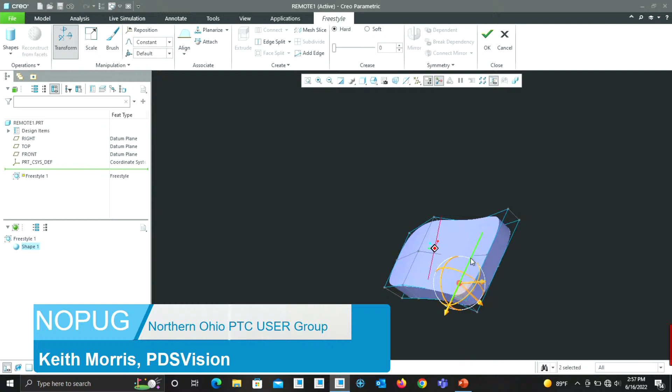So, then I'm going to create another edge along that area. Another one, another. So, I'm going to pull this up too.

But you mentioned numerical values. Yeah, as you get further along into the model, you will eventually get into finer ways to get certain details of your model. But this is really just demonstrating getting the basic shape down if it has a lot of curvatures and a lot of areas, where you're saving a lot of time by just starting with a shape like this. So it's more industrial design, conceptual design. Yes. Yeah. And not to say that this can't eventually be turned into a final part, but this is just a lot quicker way to get the concept down.

Can you have a reference model in this assembly where you can see how this thing you're building relates to something else, or is it just one thing at a time? You could put an assembly together and have this as one part, and then have the other part as a template. Also, we started with a 3D primitive. There's also 2D primitives, so you could have a sort of trace sketch, if you will: bring in an image, scale it appropriately, and then start with a flat and flesh it out from there. There's a different combination. Yeah.

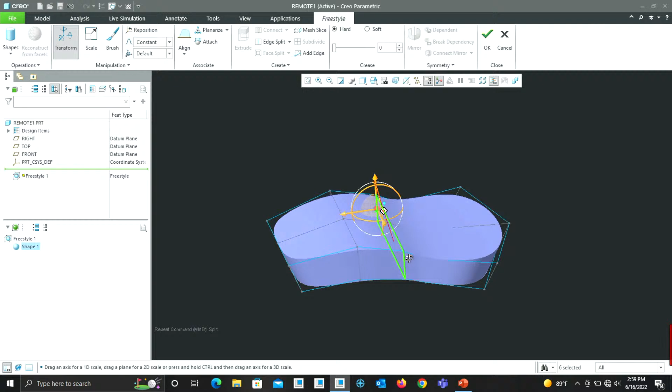So one thing I wanted to do was also start to create a button. Oh, before I do that, I wanted to show you one quick thing. If I wanted to get these edges smooth all the way around, I could just select the whole model, and there's this crease tab right here in the ribbon. I'm going to switch to soft, and I'd be happy with that right there, but you can increase or decrease as you see fit. I don't even have to add more edges to create that. It just automatically does it by selecting the whole thing and choosing that. I know this isn't exactly looking like a remote, but as I continue to push and pull and drag it, it eventually would.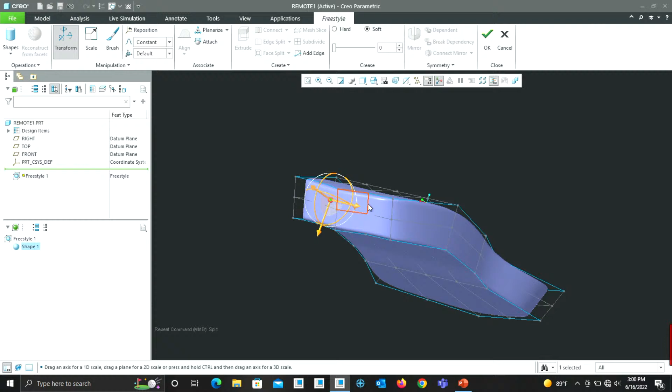One thing here too: if I want to start creating buttons, I could take the face there, and there's different levels of insets here. I want to do two of them because I want it to look like the button is nesting in the groove. So I just want to start with this one. Before I move it, this crease is selected on soft. I just want to turn it up higher and then move it down. I could keep it as an oval, or I could make it a circle if I changed it back to scale and moved it out some.

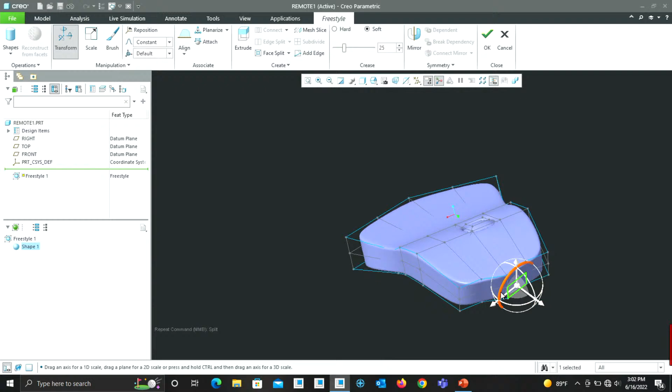And then I want to do an inset again, but I want to put it here. Then I'm just going to push it up like this, and it'll start to look like a button. And as I'm tessellating and going throughout, I could add smaller buttons. I could add more towards the top. A lot of the newer ones have a larger central one towards the top, and then smaller ones towards the bottom. And the reason I chose a remote is because it's just a simple design. It gets down to the basics there.

I want this longer, this whole end here. I don't want to work too much in this right now. I just wanted to show you the concept of sculpting, pushing and pulling, and creating a very quick concept. It takes out the tediousness of building that kind of surface in the traditional way. So I'm just going to leave it with that.

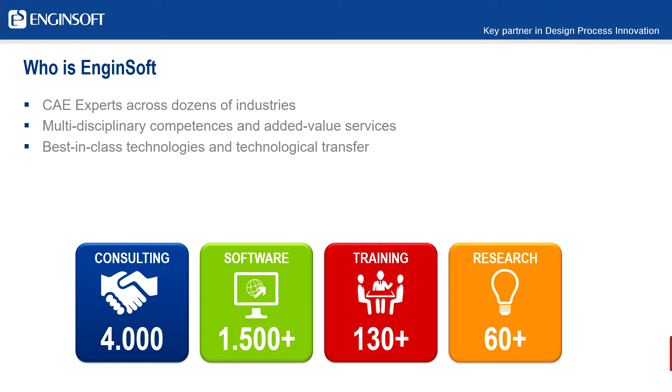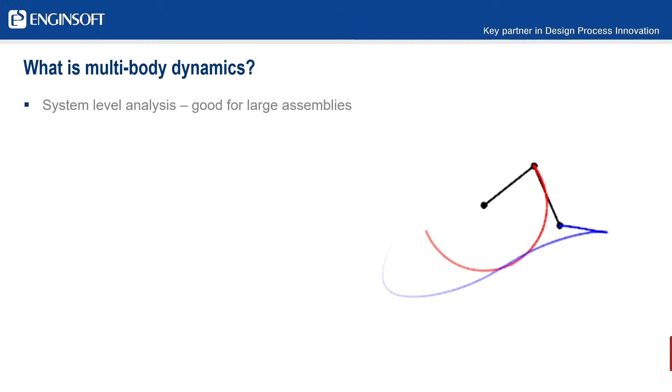Before I do an explanation, who here is familiar with multi-body dynamics as a simulation concept? All right, so I'll start from the very beginning. Multi-body dynamics is really a system-level analysis, comprised of kinematics and contacts and multi-physics integrations. Going through each of these one at a time: kinematics is what you did in Dynamics 1, right? This is really simple stuff that gets very complicated when you have thousands of bodies to keep track of.

To compare and contrast with FEA, which is a little more well-known, multi-body is really dealing with rigid bodies. Unlike FEA, where you're discretizing a component and it can flex and move in complicated ways, with rigid bodies we're really just dealing with a coordinate system with mass and moment of inertia properties, connected to other components. In the software, you'll usually see some visualization of the geometry, but the solver doesn't actually care about it. That's why I say it can be reduced to a local coordinate system. And then we have joints connecting different components.

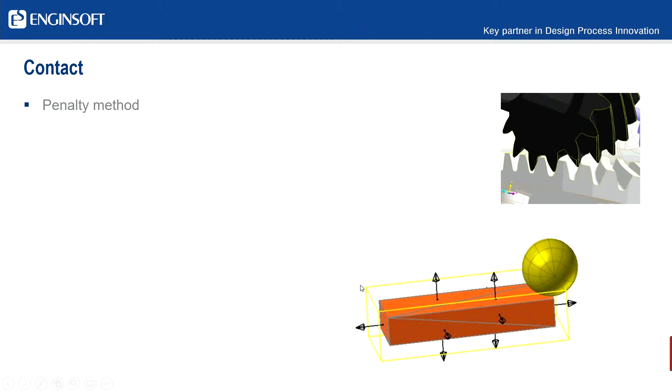I'll start with the search algorithm. So you can see this bounding box here, and typically there'll be some bounding box surrounding each component and looking at the actual geometry so that it can figure out when two components are close enough that they should be evaluated for contact. And then when they are that close, depending on the way the contact is implemented, there'll be some discretization of the surfaces.

So this is where the actual geometry itself matters. And we can see that there's a very simple tessellation for a simple geometry. That's all you actually need. And then we have this sphere. So for the sphere itself, we can actually represent that as a single point and a radius. So those are the kinds of simplifications you can make for evaluating contact.

And when the software does this search algorithm, it sees, okay, we've got nodes from one body overlapping nodes from another body. We basically create a virtual spring that forces the two bodies apart from each other. So it sounds really simple, but as you play with different solvers, you'll see that some implement this very well and some don't. So that's kind of what separates your really simple, maybe it has contact, but you probably shouldn't use it, versus more enterprise expert level tools.

And I'll go through more detailed slides on this, but I want to cover when to use a dedicated solver. So when you have contact-driven problems versus just kinematic problems, or when you have flexible components. So that's kind of a coupling between FEA and multi-body dynamics. Or if you have other multi-physics problems that you need to deal with, and lastly, automation.

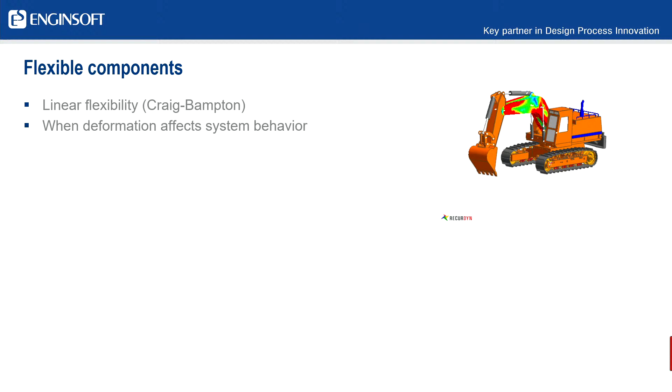So the other difference is that simplified tools like Creo Mechanism don't really support true flexible components, whereas any of your advanced solvers are going to have at least one, maybe two different ways of approaching that. I won't go into a ton of detail on the difference between these or what Craig-Bampton is, but basically this is a simplified way to deal with flexible components, and then this is a more general solution to that.

So we can see this is almost like having embedded FEA in a transient solver. So I always like to describe it as almost a middle point between like an LS-DYNA and your more traditional FEA tools. And then we have self-contact here. That's something, again, you'll see in some solvers and you won't see in others.

This was a really good example of the RecurDyn solver. Just a brief tangent - some of my colleagues did this as a benchmark. A customer, who I can't name, kept having issues with premature failure of CV boot joints, or CV joint boots. All my colleagues knew at the time was that they had problems, so they got the geometry and built out the simulation model.

This is a fully nonlinear, flexible component. I don't have a video on this, but then they kept finding this weird buckling behavior on the boot.

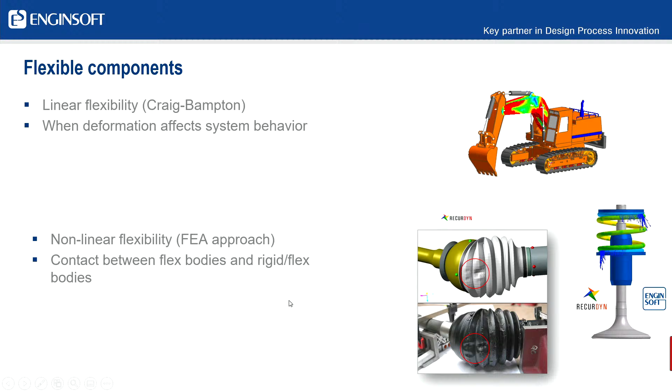All right, and lastly, I'll talk about multi-physics. You can use multi-body tools as a good central point for multi-physics or digital twin, depending on the buzzword your organization uses. As a system-level analysis, they're a good point to plug or bolt on other solvers. A very common one is control systems.

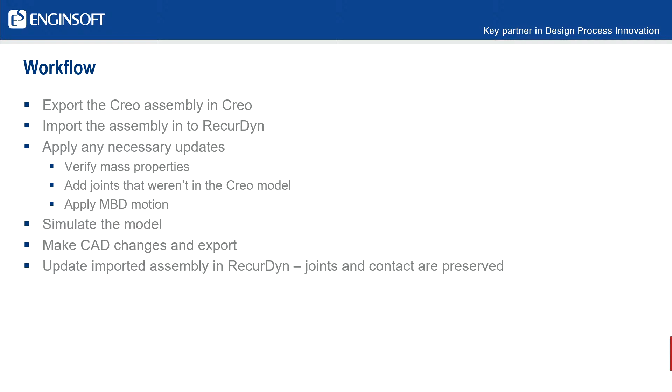And then the workflow that we're going to go over, basically, you export from Creo, import into RecurDyn, and that starts the process. Anytime the model updates, we simplify everything moving forward.

So this is playing good. This is actually a super fun demo model that I found on PTC's internal site. It's a fully designed Lego model, and there's a ton of detail, I think there's 700 parts in here.

So we can see we went to the Applications tab, we put a single button in, so we try to make it very simple. We put a single button into the Applications tab, click on that, it does a big scan of the assembly. This is probably going to outrun me, so I'll pause it really quickly. So then these are the only options you have to deal with on the Creo export side.

By default, it's just going to export what is visible in the model. That's one thing I have an issue with in Creo, I don't use it a ton, so it's always kind of a nightmare going through and saying, okay, I want to export this subset of the model. I'm sure there's faster ways to do it, but I don't do it enough to learn them. So we wanted to say, if it's visible, it'll get exported. If it's not visible, it won't.

You can obviously switch and do the more traditional selection or deselection. But the nice thing is if you have views defined, and I'm blanking on the name of it, you can set up a view that's all of the simulation components. That's a Creo thing, like a simplified representation. So if you have a simplified rep for RecurDyn stuff, or just one that already exists for simulation, you can reuse that. Again, we want to make sure you can reuse as much data as possible.

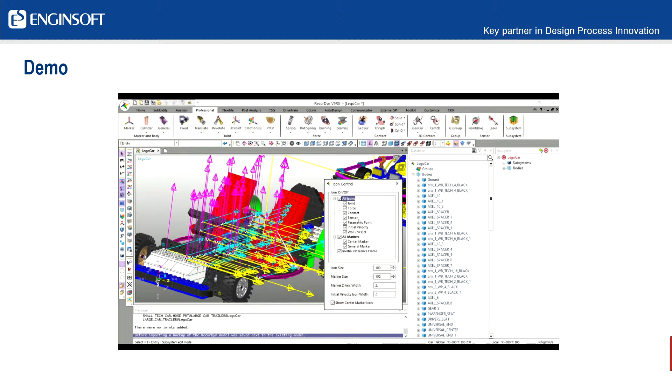Jump through. So we can see there's a lot of components here. Okay, and now I'm just going to go in and look at what happens when you merge a subassembly. Give it a second.

Sorry, I have no idea what's going on with this video, it keeps jumping around. Okay, so now I'm going to go into this subassembly, and if I keep going one level down, it's going to go into, I think, the tiny car that's in the trailer, and we'll see that this is considered a single body, so we can constrain it very simply.

But let's pause it here. Okay, so now I'm in one body, so we can see that there's the little car in the trailer, and each of the parts is still available as a solid. So if I go into the body, I can see everything that's in there. I have all of that geometry information. If I need to define contacts with one of those surfaces, I can, but I still have the simplicity of seeing it as one component in the model tree.

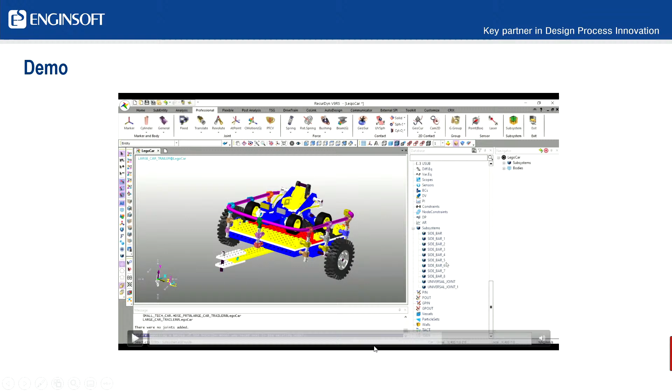And then the last thing I'll show is the update process. Let's see, okay, so in this kind of contrived example, we're saying that this Lego piece was wrong. In reality, I'd probably have to swap out a bunch of geometry, but I'm just going to do a Boolean cut to shorten it.

And then I jump ahead to where, okay, so then to simplify the export process, I change so that only this component is updated, because I only actually updated one thing. We'll pretend that I updated a whole bunch of stuff — it works exactly the same. So I'm going to make only this assembly visible, hiding everything else so I can run through the export a little bit quicker.

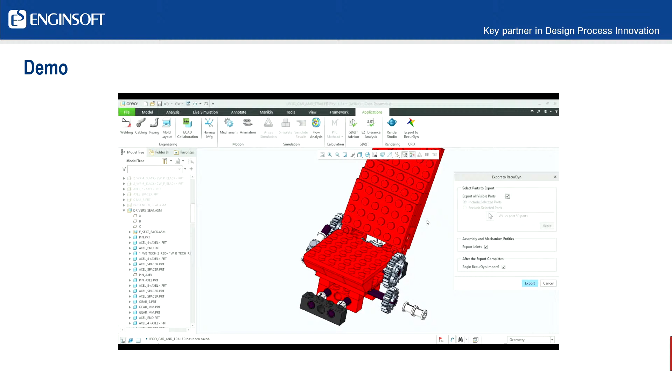And then the export process on the Creo side is exactly the same every time. So from the designer's perspective, if they're the ones exporting and then sending it to simulation, they just have to do the exact same stuff every single time, and then send the Crix file to simulation people. Right, so we've exported it, and then it's going to open up, ask me if I want to update it.

So we jump past, it goes in, finds the object, reassigns contacts as necessary, so anything you've already added to the model after doing the import gets preserved. There's some kind of tricky things we have to do to make sure that happens. Then we swap out the geometry and return you back to the main view, and you're ready to simulate. The same thing applies if you updated one thing or twenty things, or if you don't know how many things you updated, because somebody else is making the changes — it'll go through, find everything based on timestamps, and make those updates. And then it gives you some log output at the end, so you can sanity check what happened.